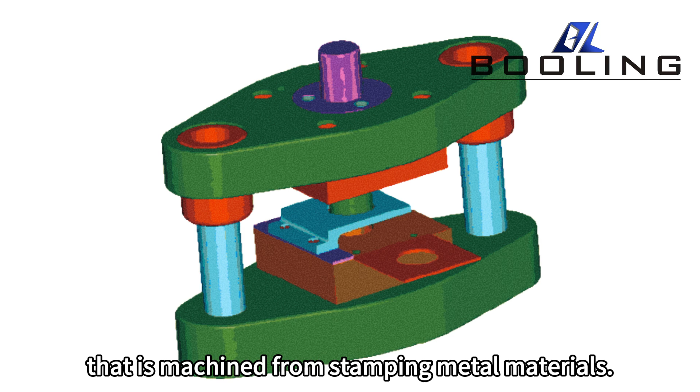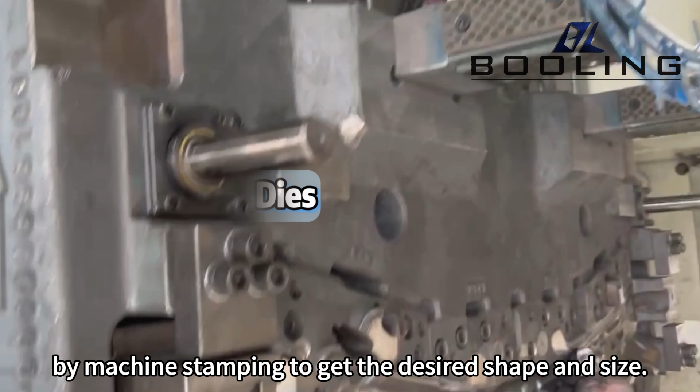A metal stamping die is a workpiece that is machined from stamping metal materials. It puts the metal material into a mold and changes its shape by machine stamping to get the desired shape and size. The design and manufacture of such molds plays a vital role in the production efficiency and quality of

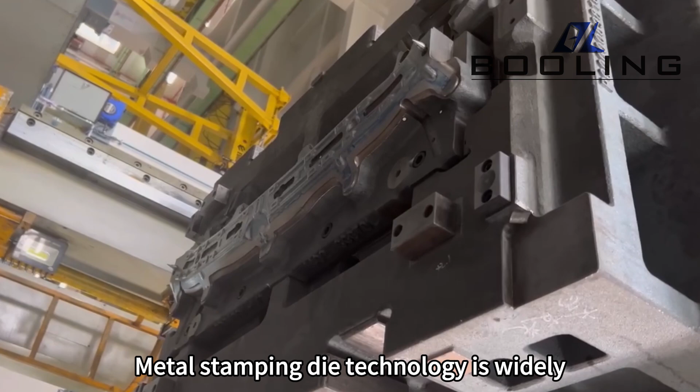the product. Metal stamping die technology is widely used in various industries such as construction, home appliances, aerospace, automotive, electronics, etc.

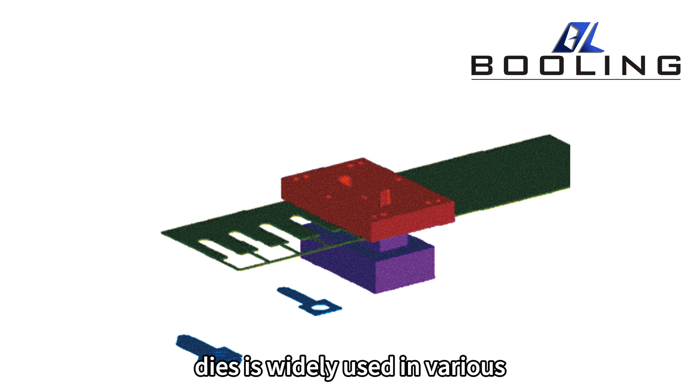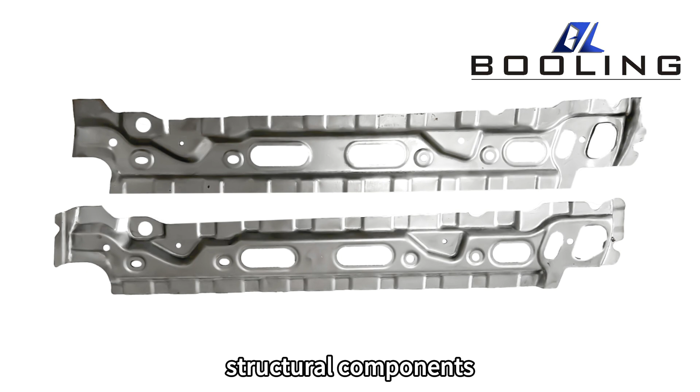The bending process of metal stamping die is the process of stamping the material into a certain angle and shape. This is a commonly used process in which these molds are often used to form parts with bending properties. The bending process of metal stamping dies is widely used in various industries to produce components with bending characteristics, such as the production of body panels, structural components, and decorative parts in the automotive industry.

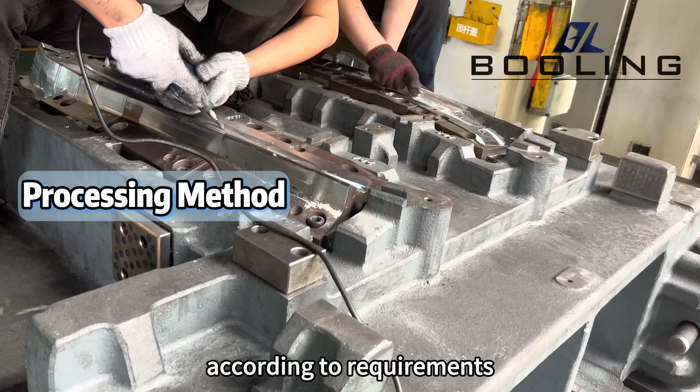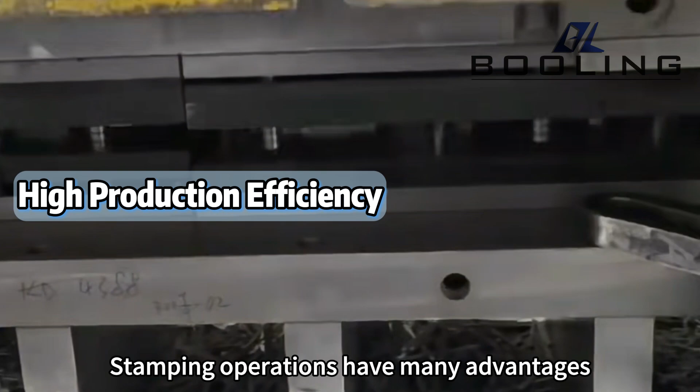There are many processes involved in metal stamping dies. Various stamping processes are produced according to requirements and specified shapes. However, they all involve pressing a workpiece into a mold to form a shape. Stamping operations have many advantages, mainly including high production efficiency, complex shapes, and good precision.

When manufacturing metal stamping dies, there will inevitably be error tolerances, but the manufacturing errors must be within the specified range.